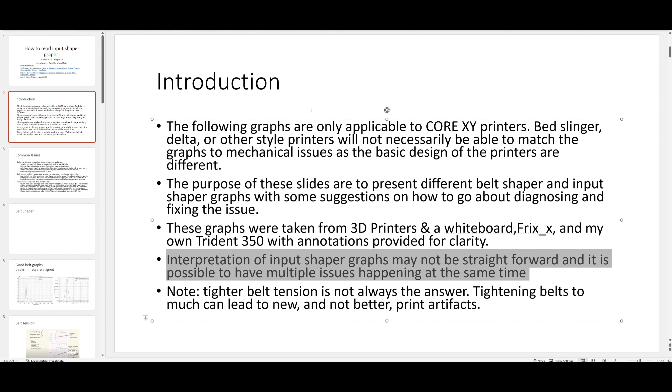That being said, common issues. We'll get into this more when we see it in belt shaper, but 2 or 3 spikes may or may not be an issue. It's all going to depend on where that spike is and what it looks like.

Do you need to do a test print? Yes. You can try to rely on the graphs, but sometimes you get a bad ADXL where maybe one axis is broken, or you're getting results but your prints are coming out bad. You always need to do a print.

And the last thing, this will be more of an input shaper topic, but I'll prelude it: just because input shaper says you can do a certain accel does not mean it's true. It's garbage in, garbage out. If your graphs look like crap, you're not going to be able to do that accel and have your prints look good. All right, so let's do belt shaper.

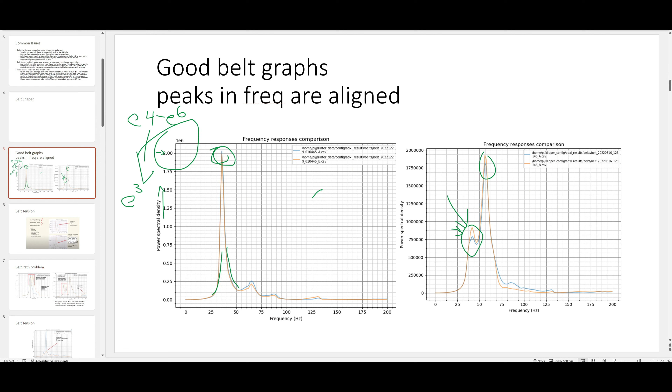For something like this, you'll have to run input shaper to see if this is really a problem. Right now, we're going to say it's good. So we go here, right? This is what a standard, I'll go back to this graph here. This is what standard Klipper looks like, this is what standard Klipper is going to give you. This is the data as came from 3D Printers and a Whiteboard.

So if you go talk to Frix, or you go to his GitHub, Frix underscore X ShakeTune, what you want, as I stated before, is you want both peaks to be aligned in amplitude. Does that always happen? No, it does not. If you had to choose, do you want the same amplitude or frequency? Choose the frequency. So for me, the way I would do this, this peak right here, let's just cross this out, let's just say we didn't have that, we just had the single peak. If this is what I had, I'd be more concerned about these peaks not aligning in frequency than they do in amplitude. If these were aligned in frequency, I would call this good.

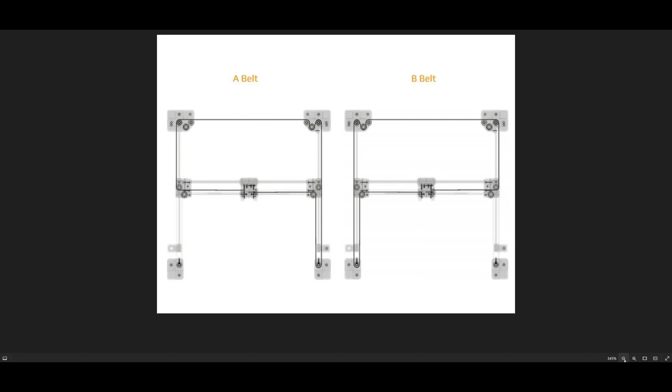So what you're gonna do is you're gonna run one belt. Right from here, you're gonna run it all the way over here. You're gonna measure it out. You're gonna give yourself some slack. Right, we don't want these belts to be exact lengths. We get some slack. After you run one belt, you take it off, and then what you're going to do is you'll cut it. Right, so sorry, run the belt, give yourself slack, and then cut it. Then take the cut belt you just ran, pull it out of the system completely.

Get your other belt and put them together, one tooth higher than the other, and you're going to interconnect them. And just keep pulling and pull smoothly. And what you want is the belt that was one tooth higher than before is now going to be one tooth less, and you cut it. So that way your belts, from top to bottom, one belt has one tooth higher on the top, the other has one tooth higher on the bottom. That way you know your belts are the exact same length.

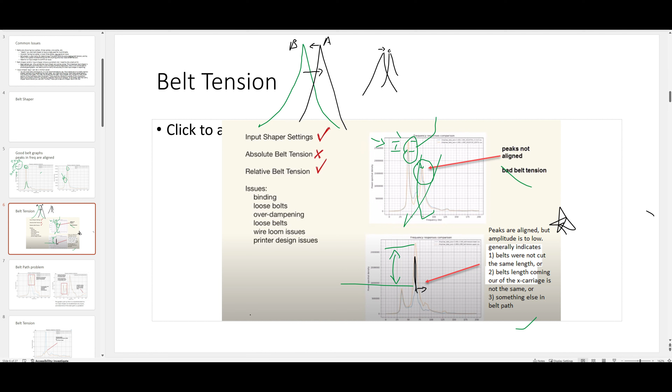After you do that, let me see here. We're gonna give some pictures because why not? This is all fun and games.

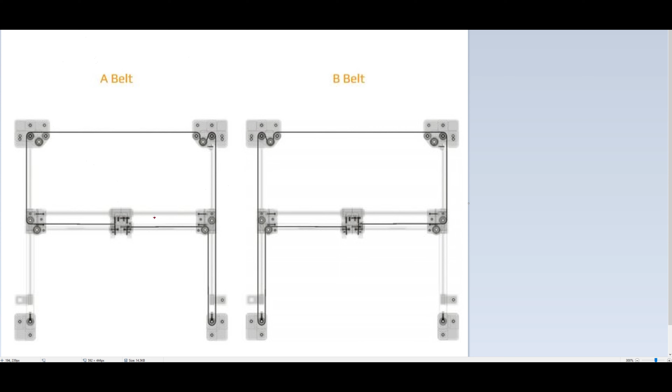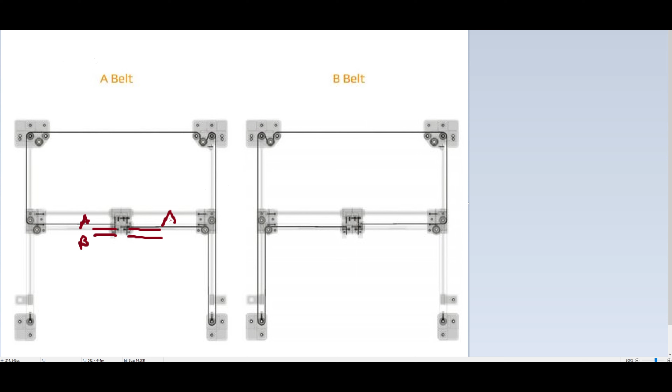All right. So after you do that, you got this tool head. You are going to have two belts out here, right? Imagine that this belt and this belt, it's all the same picture. You're gonna have a belt here. You're gonna have a belt here. So one is A, one is B, and then on this side you're gonna have one, and this side you're gonna have one. You're gonna have one A and one B. What you want is on each side. So this will be the right side. This will be the left side.

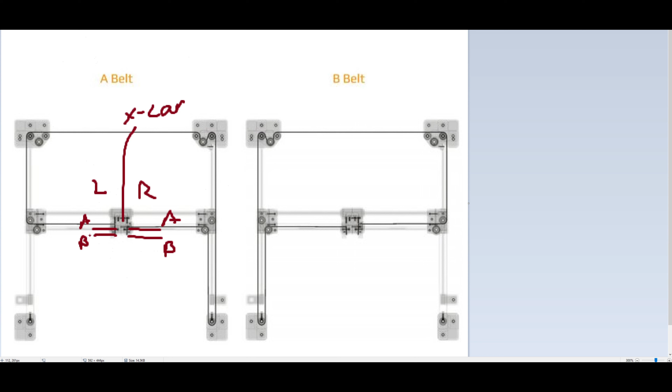You want these teeth to come out of the carriage. This right here, that's your X carriage, right? X car. Call it X car. X carriage. You want the belts to be even right down there. Right here. You want the belts even, so that the exact same number of teeth for the A and B belt on the left side is the same. You then want to have the exact same number of teeth on the right side for A and B belt to be the same, coming out of the X carriage.

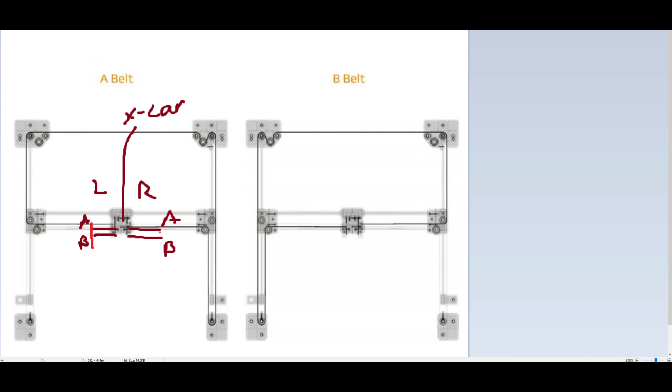If they are not, you're never going to get the glorious perfect graphs because your belts aren't the same length. Even though you cut them the same, if they're not the same coming out of here and out of here, they are not the same. And people ask, does one tooth matter? Yes. It's ridiculous, but yes, one tooth matters in getting the proper tension.

So, okay, so that takes us back to these notes here. Let's see if I can get back to it. There we go. Right here, belt not cut the same lengths, something else in the belt path. You could have an improper tension, right? Another thing that could cause this is improper tension. All right, so now we're going to belt path problem.

But what are the main ones, right? You guys don't care that everything can be everything. You want to know what the hell is my graph and how to fix it, right? Well, it could be belt alignment, path, wear, and bearings, right? So what is belt alignment? Well, on Vorons, we'll pull up our handy dandy Voron picture again. We'll zoom that in.

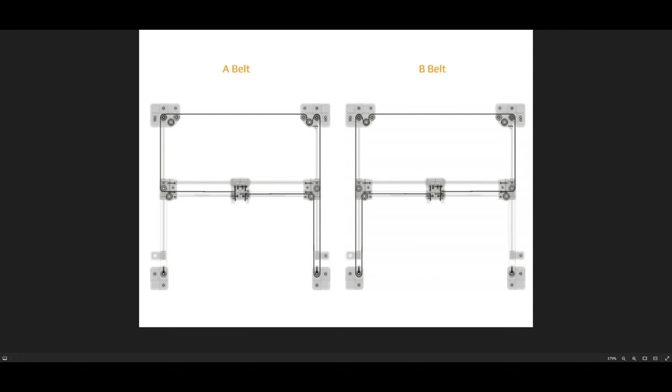Okay, what else? What else is this stuff talking about here? Belt path. What the hell is that? That's what I just said. That's belt path. Belt alignment. You got your belt not in the middle of all the bearings, idlers, and pulleys.

Okay, so let's get some terminology. What is a pulley? All right, let me see. Let me get my green thing. Where's the green? There we go. A pulley. Right? That's on the motor. Pulleys are on motors. Idlers.

What are your idlers? They're things that just spin freely. So basically, everything else is an idler. All of your other bearings are idlers, effectively. But when we talk about idlers, we're talking about the 20-tooth idler on the XY joint. Everything else is a bearing. So the pulleys are on motors. Idlers are generally your 20-tooth idlers, and then the bearings are everywhere else.

What can happen in the belt alignment is that your gantry is not straight, or your belts aren't straight, and a belt starts riding up on the flange of a bearing. And so it may be half on, half off the bearing on the flange. If it's riding on the flange, you could get something like this.

Belt wear. If you're using G2, if you're using Rama idlers or BFIs, you can get belt wear on the top and bottom of the belt, which generally won't come up here. What we're looking at more is the teeth starting to go on the belt itself. So if you look at your belt, brand new belt, pristine, nothing happened. You run that thing for a day or two, and you'll notice that the pristine belt now has turned black. Right? It's just friction. It's going to happen.

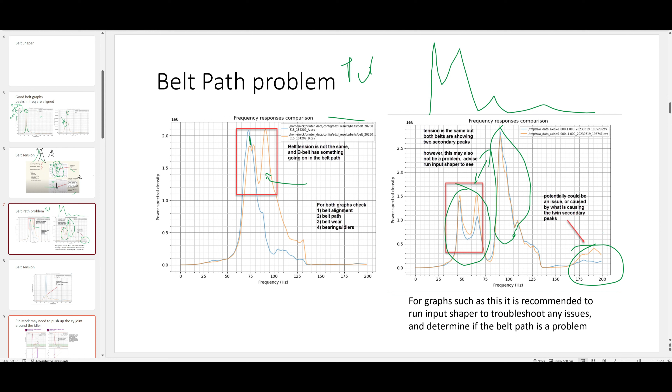So when you get a graph like this, one thing you have to always have in the back of your mind is every time you only adjust one belt, you have the potential to do what's called belt-induced racking. You are going to throw your x-axis out of line with your gantry. So you see this graph and you'll think, oh, Reth said to do a half turn, I'm going to do a half turn. Well, you're going to also have to check the racking of your system.

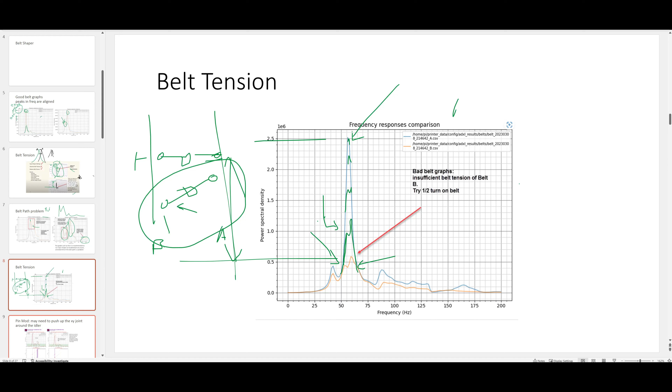So if you have this original graph here, and you tension it and you see it going up, and then this is the result, that's what you got to check. You got to check for mechanical racking, because you've done belt-induced racking now, and it may be your mechanical racking. So this is normal, like that. Your mechanical racking was just slightly out, just a little bit out. But now, because of the belts and what Belt Shaper told us, we're like this.

So you got to go back all the way here to racking. Nero 3D has a great deracking video. You look at that, follow that. The one difference is if you've already belted it, you just have to loosen the belts, and you can still de-rack it with the belts on as long as the belts are fully loose. Nothing is moving on you.

So what you want to do is you want to go back, and then say you went back, and now you're getting the same thing again. Maybe it's a little higher. Maybe you fixed this, so that's gone. So now you're not mechanically racked anymore. But then you put the belts back on, and now this will be your orange belt. So your orange belt is like this, right?

Can we change colors here? The main A belt is like this, right? Well, you could try the half turn, because you may not be that far off. You don't know until you try. So try a half turn. If it brings it up to like here, right?

So this is your difference. Go with that. Just be done, right? Once again, we're not chasing unicorns here, and if you do, you're going to drive yourself nuts. If you do a half turn and it only brings it up to here, right? Now you have this huge difference.

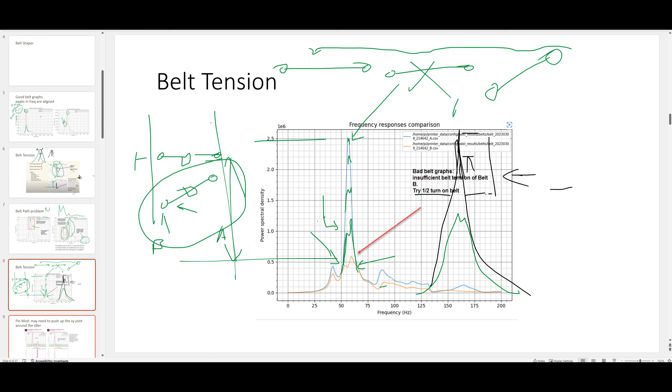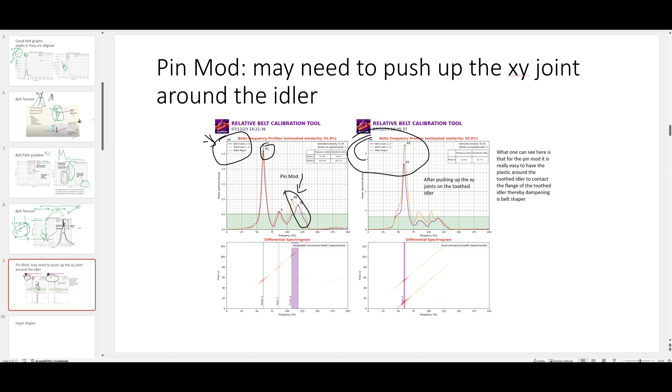And so this is 2.5e6. Even though what I said way back when is that it's fine, I knew for my machine it was low. So this is more where my machine should be at. And these numbers are variable, right? So that's why everyone always tells you to build stock.

If you build stock first and run all these tests and get it pretty good stock, you will know the baseline of your system. If you don't build stock first and just jump in with all the mods, it is hard to know what the baseline of your system is. How does your system behave?

So the pin mod, you have a pin, right? Going through the pin, you have your 20-tooth idler here, and you've got a plastic part on top and a plastic part on the bottom. There are no washers in between on the 20. We'll put the teeth in here, little things for the teeth, right? Actually, I think they go this way, but it doesn't matter. All right, that's my idler.

What could happen is this plastic part here can start rubbing on the flange. The flange is what sticks out, right? So there's a flange, there's a flange. Your belt's riding in the middle here, and once this plastic part touches the flange, it starts to rub. And then the bottom plastic can also touch the flange and start to rub.

What do you get? You're going to get basically an amplitude issue, right? The amplitude's going to go down because now you're damping the system or binding the system, both of it. But you're also going to get this weird kind of separation in frequencies. This is ShakeTune's results, right? ShakeTune's telling me there's this huge discrepancy here. This is your harmonics.

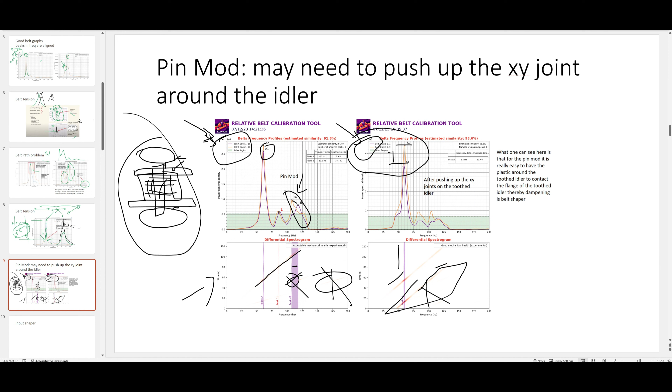So this line here is the same line as this line here, right? And this line here is right above that. That is probably what, 2, 4, 6, 2, 4. It's probably about here.

Okay, so even though the orange peaks, like this peak right here went up, so this one went up, and this one stayed about the same, all these secondary and tertiary peaks stayed about the same, but this went up. Both of these, so now these are less of an issue. If they're in the green area on these FrixX things, they're not really an issue. So this is one way to tell the pin mod. The other way is going to be on your input shapers.

So let's look at some of FrixX's stuff. I think Frix has some pretty good graphs here. If you don't know, you just type in Google ShakeTune FrixX, and it brings you to his page right here. Let's see. Okay, so let's go with this. It tells you how to use it. He gives you an explanation here of what this stuff does, and then we get some graphs.

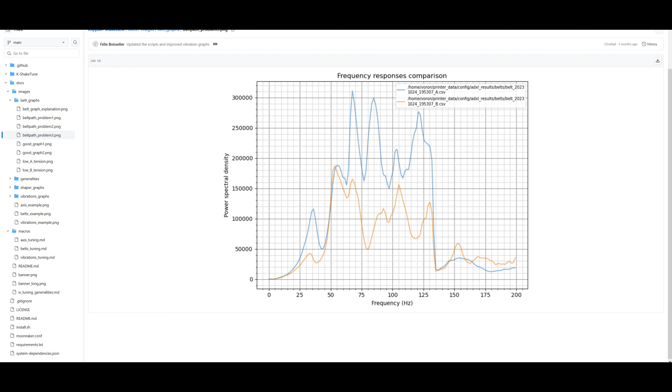But no one is going to get the exact same graphs. So a lot of this is art. It's knowing what to look for. If you see a graph, the first thing I always do, let me pull that back up. How do I troubleshoot this stuff? I either use my 'how to read input shaper graph' guide, or I'll use Frix's GitHub page. I'll compare the graph to what it looks like.

And does mine, since most people will have access to Frix, we'll use Frix. Which graph of these does mine look like? Now, Frix doesn't have all the graphs because he's a lot more conservative than I am in throwing information out. He wants to know what the cause is, whereas I get a sense of where the cause is. So you're only going to see graphs in Frix's things that he knows are the problem. I've got a little bit more wiggle room in my stuff, but I'll compare it.

What I'll do is I'll take a graph and play a matching game. What does it look like more? Does it look like this more, or this more, right? Or I'll go in here and say, which of these graphs does it look like, and I'll compare it and try to see where it's at.